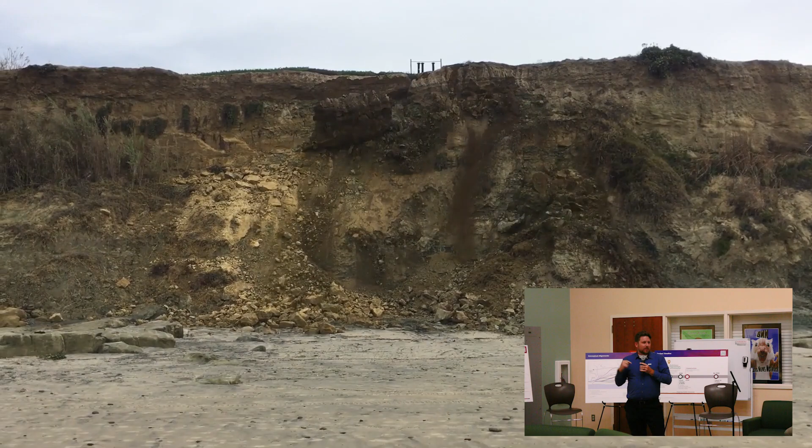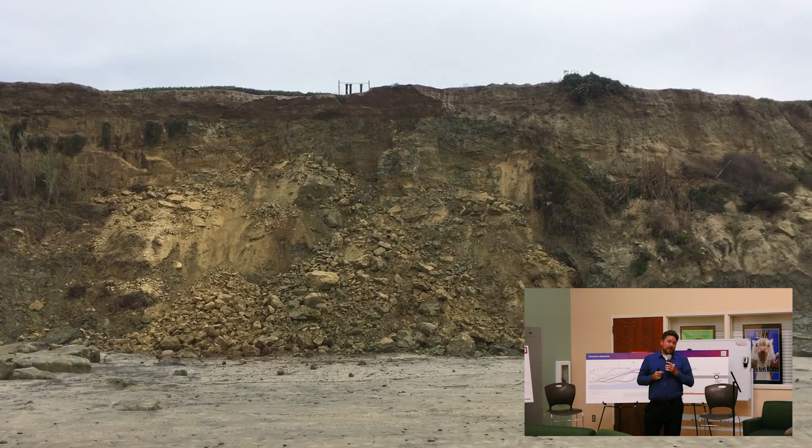This was a video captured in 2019 that shows the Del Mar Bluffs and a small bluff collapse. This type of event happens all the time. We've been monitoring the bluffs with the Scripps Institution of Oceanography, and they've determined that we're seeing up to 6 inches of bluff erosion per year over the last 20 years. That's really the main reason why we need to get these tracks off these bluffs.

But it's not the only reason. We also have a vision for this whole corridor. It's not just in Del Mar, this is across the whole corridor.

So in 2021, SANDAG approved and adopted this Transit Leap vision as part of the 2021 Regional Plan. With that vision, it talks about major improvements in this corridor. And remind everybody, it's not just the Coaster, it's also the Pacific Surfliner trains that go to LA, Santa Barbara, San Luis Obispo, and it's the freight trains that serve our Port of San Diego and our military institutions. We're talking about, in 2050, 1 Pacific Surfliner train per hour per direction, 3 Coaster trains per hour per direction all throughout the day, and a travel time of 33 minutes between Oceanside and downtown San Diego. Now, you can't drive that fast today, even in the middle of the night, but that's the transformational vision we have for this corridor.

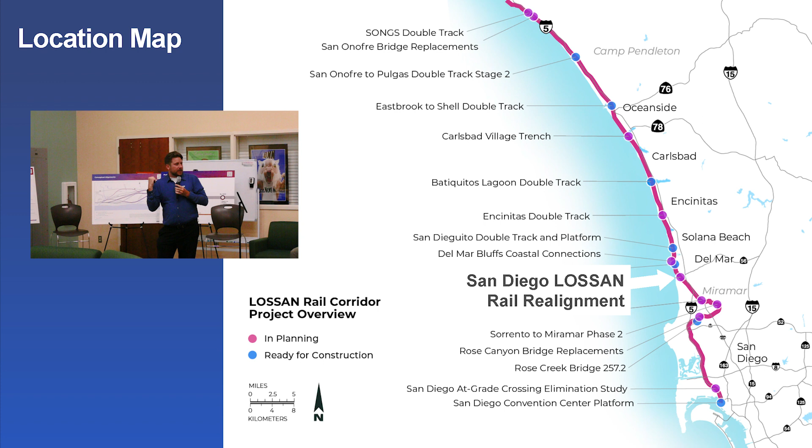Ultimately, they do have plans for a long-term solution up in Orange County, but that's several years away. We want to work with them, we're not competing with them, we're all in this together. This whole LOSSAN corridor - improvements in Orange County benefit San Diego, and improvements in San Diego help Orange County and LA, and vice versa. We're all connected.

All right, so let's talk about the project goals. This is really important in the context of the reasons why we're doing these projects and what these alignments are. So, of course, the obvious one: relocate from the bluffs. We need to identify somewhere else to put these tracks from this stretch that's right along the bluffs in Del Mar.

Two, we want to minimize community impacts - not just in Del Mar, but Del Mar Heights and Solana Beach. We want to preserve access to the fairgrounds - that's a regional community amenity.

We want to improve travel times and achieve that transit leap vision. How do we do that? We straighten curves and we add double track. Right now it's single track, so trains have to wait. All of our plans include straightening curves, improving the speeds, and double tracking.

We also want to improve coastal access and safety. There's an at-grade crossing where cars and trucks cross over the tracks right next to Powerhouse Park, and there's people walking along the bluffs there. We want to make sure we can improve the coastal access, open those bluffs up for people to enjoy, as well as improve the safety for the people using that facility, as well as for the train itself.

And we also want to preserve wetlands. We're also going through Los Penasquitos Lagoon - that's a single track section - and we also want to preserve the wetlands up in San Dieguito.

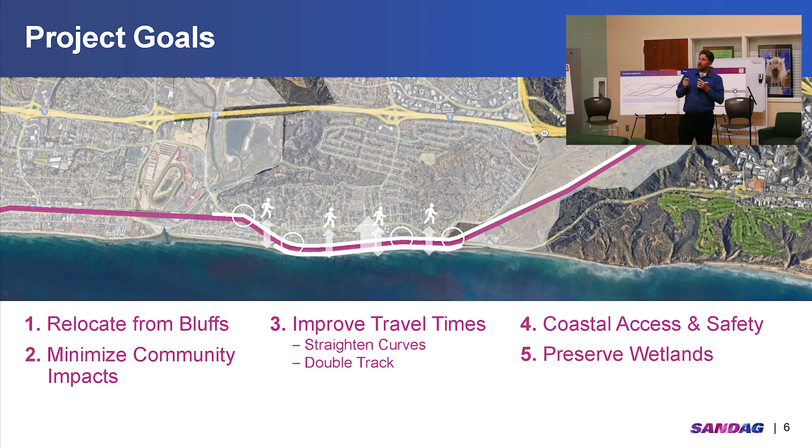Okay, so why a tunnel? Well, when you look at Del Mar, there's really no open path where we can realign this corridor. It's all developed, and what you also notice is that there's very steep terrain. We've got the San Dieguito Lagoon on the north side and the Los Penasquitos Lagoon on the south side. If we want to achieve the goals of the project - straightening it out, minimizing impacts - the best way to do it is put it underground. That's why all the alignments we've looked at so far have all been tunnels. I'll explain a little bit more why.

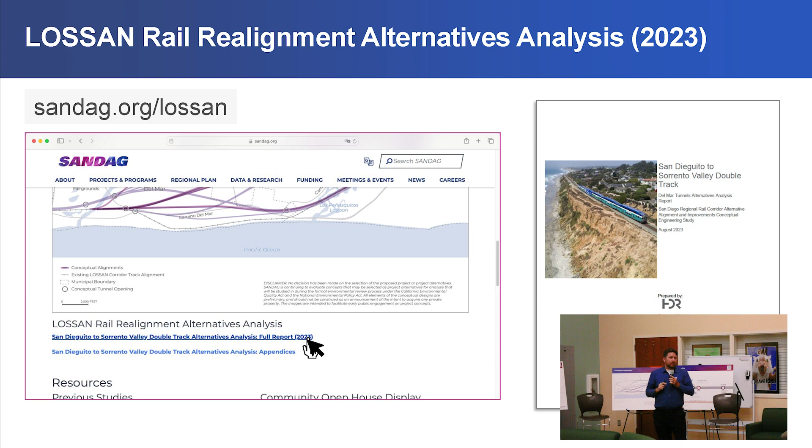So how are alignments selected? Let's get into that. Over the last two years, as Robin mentioned, we've been working and completed the LOSSAN Rail Realignment Alternatives Analysis. If you go to this website, you can see the culmination of all the work we've done. Click on that 2023 report - that's the most current information, and it has all of our information on this project. I recommend everybody go there and read that to get up to speed on where we stand today. I'm going to cover what's in that report, and you can actually talk to several of the folks at the tables afterward if you have questions or want to see more details - we have people that have worked on that.

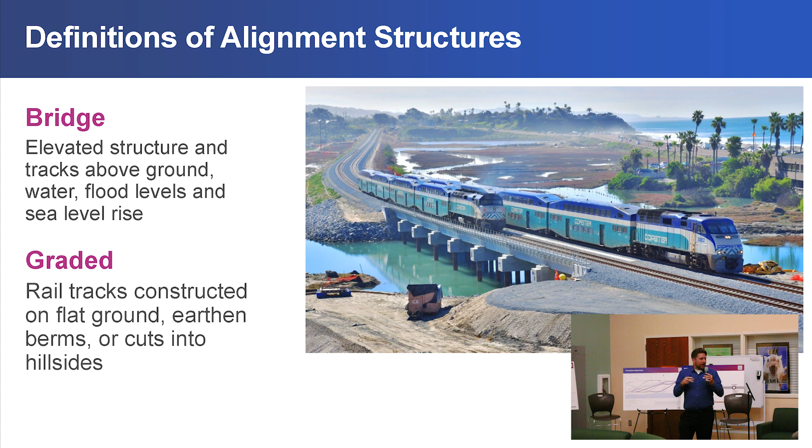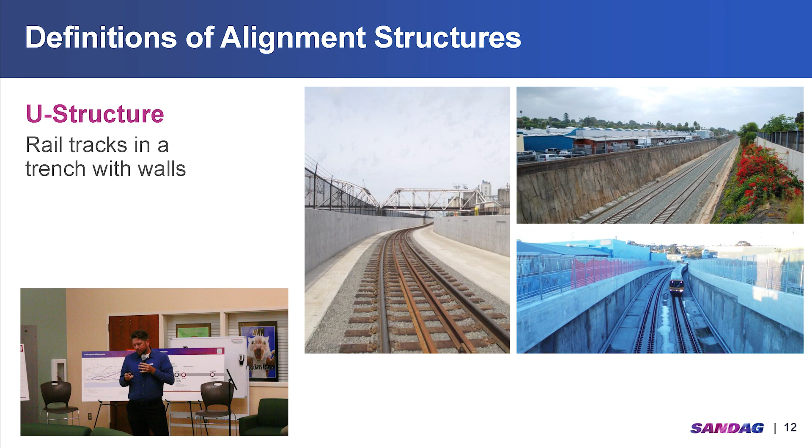And then we have cut and cover. So these are tunnels, but these are tunnels that are shallow, that are connected, that are constructed from the surface and then backfilled over, so you can deck over them. Usually as you're transitioning from that U-structure to a tunnel, you start with a cut and cover section. But obviously with that environment, you have a lot of surface impacts.

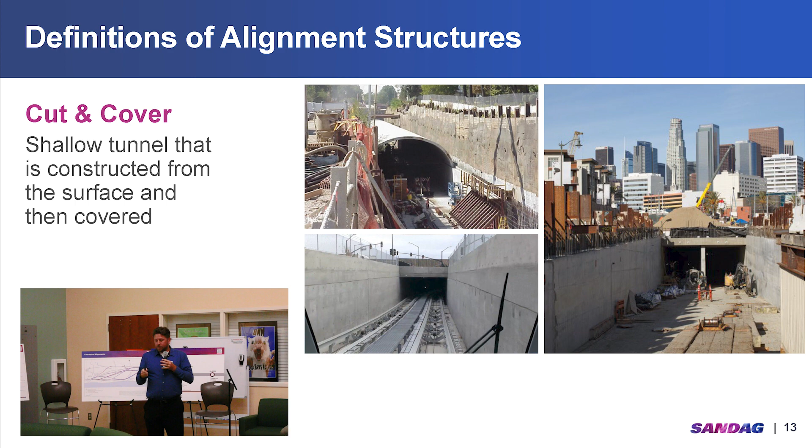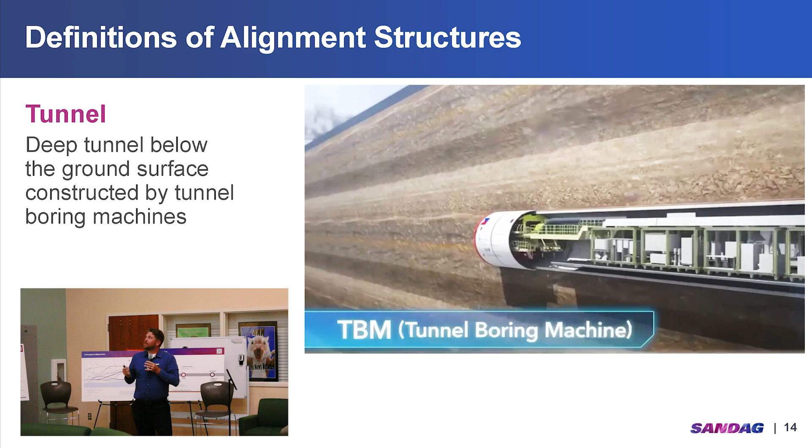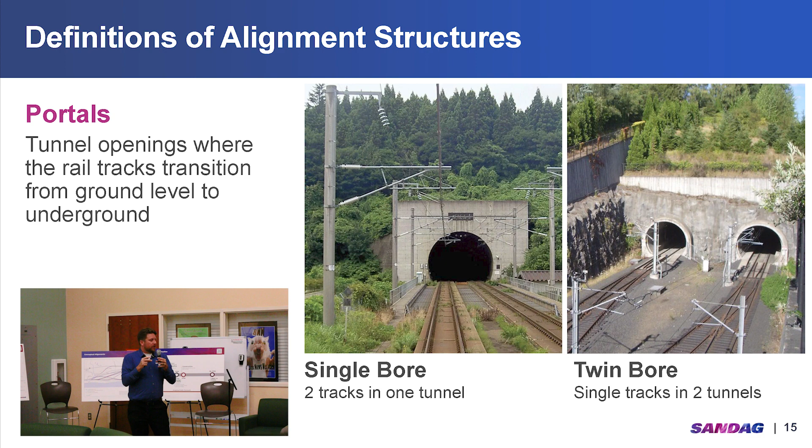And then we have things called portals. Essentially these are just the openings where the tracks go from the surface to underground. We have two configurations we're looking at: single bore tunnels and twin bore tunnels. Single bore just means it's a larger tunnel but with two tracks in it. Twin bore is smaller diameter tunnels, but two of them side by side with one track in each.

And then it's also important to note that when we're designing these rail corridors and alignments, we can't make these things up. We have to stick to engineering best practices and standards. It's talked about in the report—you can check out Appendix J, and that highlights all the engineering basis of design requirements that all of these alignments must adhere to. This will make more sense as we jump into it in a little more detail here.

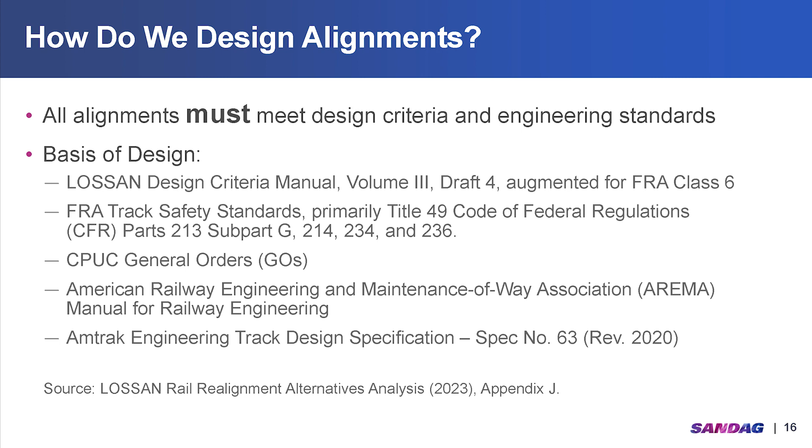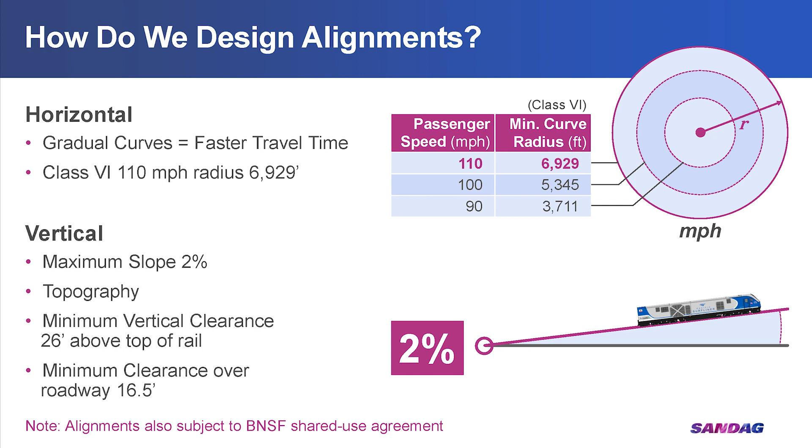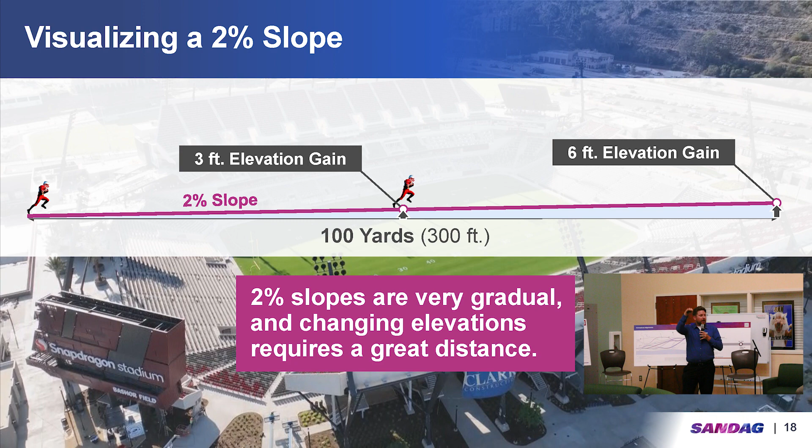So how do we visualize a 2% slope? We talked about how it's very gradual. Let's have a hypothetical—it's football season, our Aztecs aren't having the best year, but let's say we're returning a kickoff. We got a football player on the goal line, and as he runs up to the 50-yard line, he's 3 feet higher on a 2% slope. All the way at the end of that football field, as he's scoring a touchdown, he's only 6 feet higher. So from one end to the other, that's the maximum slope of a rail corridor. Essentially, 2% slopes are very gradual, and changing elevations, going from above ground to below ground, requires a great distance. So those are the two important things.

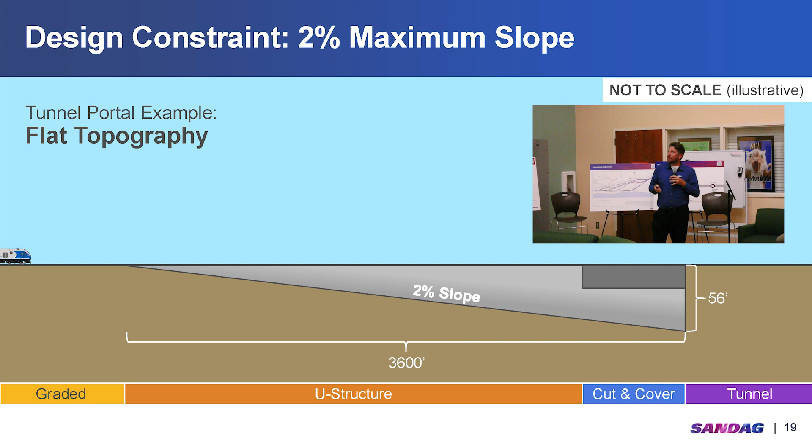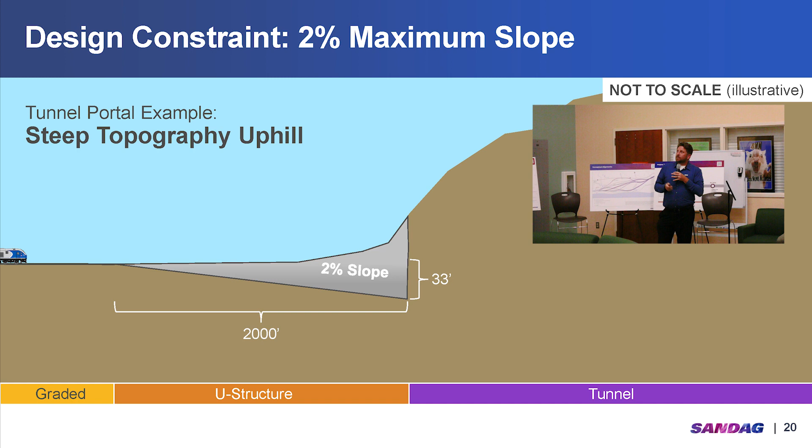Now, we also heard a lot about a portal in the fairgrounds. This is what we hear a lot, like just put it in the fairgrounds. And I just want to illustrate some of the challenges with that. I think it's difficult to see when you're looking just on a map. You've got to look at it from the side view.

In this instance, I'm going to replay it again. Let's see if it'll work. So if we're coming off Solana Beach, even though it's in a trench, it's much higher than where it is in San Dieguito Lagoon. In order to get down underneath the lagoon, we've got to be deep enough below the surface of the river. We'd have a large cut and cover section and then a large U structure. And look at that, over almost 7,000 feet to get back up to grade if we're dropping that deep. So that is a challenge. It's just a much bigger structure if we're going against topography on a downhill.

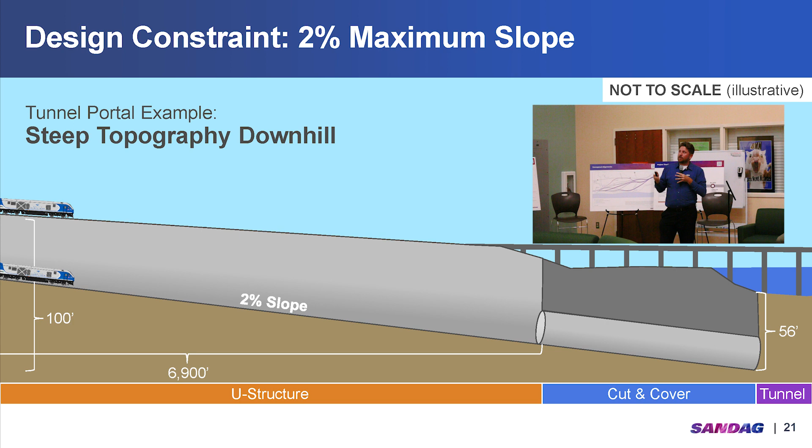Okay, so let's look at vertical clearances. This is another key factor. So I talked briefly about twin bore and single bore, but in the context of these alignments, twin bore, they have a wider footprint, but they can be shallower, so that vertical transition doesn't have to be as deep before we can start the bored tunnel section. When you have a single bore, the footprint's a little narrower, but we have to be much deeper.

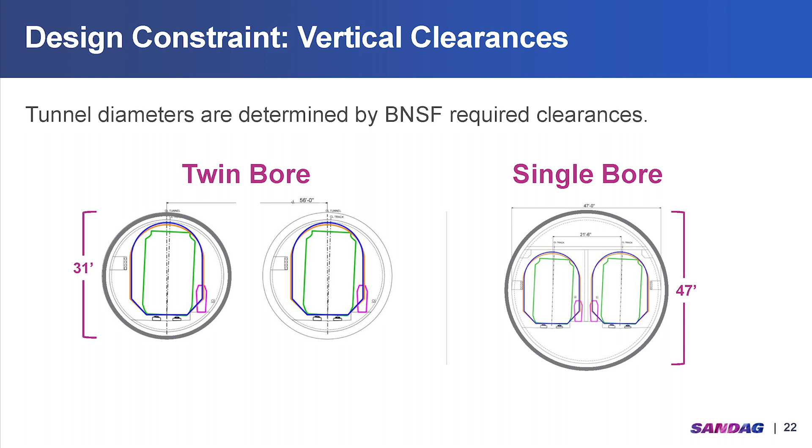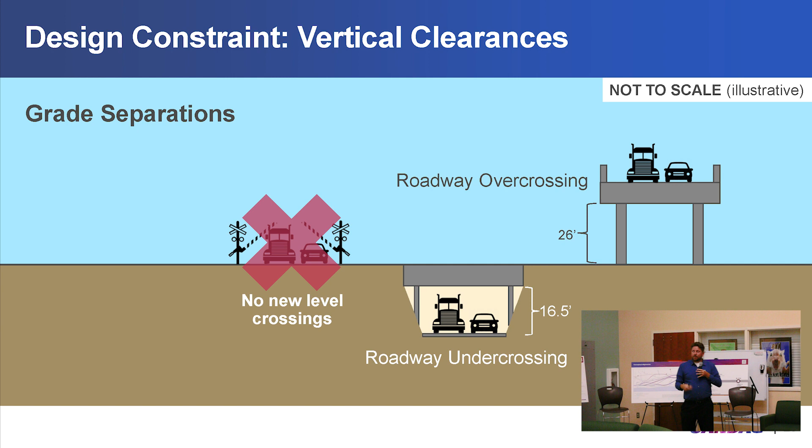And so there's trade-offs with each of these, and so we're looking at that. So that's another constraint. Another thing with grade separation, remember the goal of safety. We will not have any new at-grade crossings. So when we're crossing roadways, we need to make sure that we have the appropriate vertical clearances for roads to go either under or over. And you got to think about the ramping up and down of the roadways to get over or under the rail corridor. And that has a footprint of itself too.

Okay. So the alternatives analysis, they have maps like this. This talks about the different types of structures. So this is Camino del Mar. I'm going to go through all of these, and it shows where we have a graded section. So this one ties in right at the San Dieguito Lagoon. So we have a double track project with a platform at the fairgrounds. This particular alignment ties into the south abutment of that bridge.

Let's see if I can use the pointer right there. And so we're on a graded section. We go down into a U structure and go under Jimmy Durante and into a deep bored tunnel, roughly, but not directly under Camino del Mar. And then we pop out under Carmel Valley Road and have bridge structures. And those yellow lines are the bridge structures through Los Penasquitos Lagoon. And that is where the existing rail corridor is. And there's bridges on there, but those are single track bridges, and they're not as wide as the ones we're proposing here.

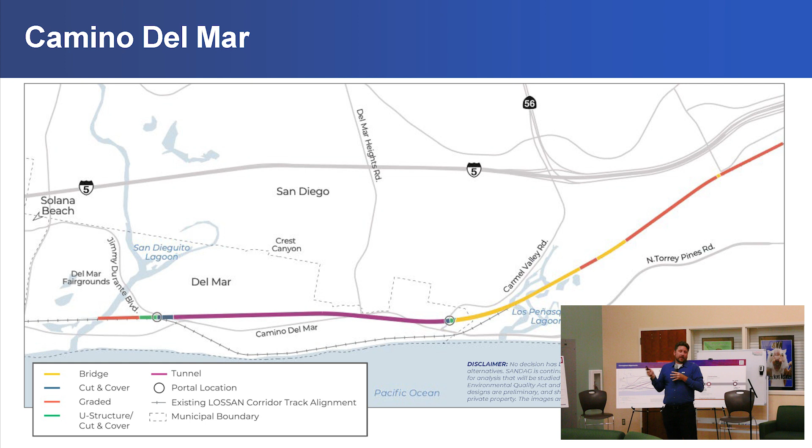So our goal is to have no net fill in the lagoon. So if we're taking a bridge, or if we're adding longer bridges instead of wider berms when we're in lagoons, to minimize, and that goal is preserving wetlands.

So we'll go through some of these a little more quickly, and we have a map up here too. So if you want to look afterward, you can come talk to me and we can go through each of these. But we have Crest Canyon and above with essentially the same alignment where we go under Jimmy Durante, but this one would pop out over Carmel Valley Road near the 56 interchange.

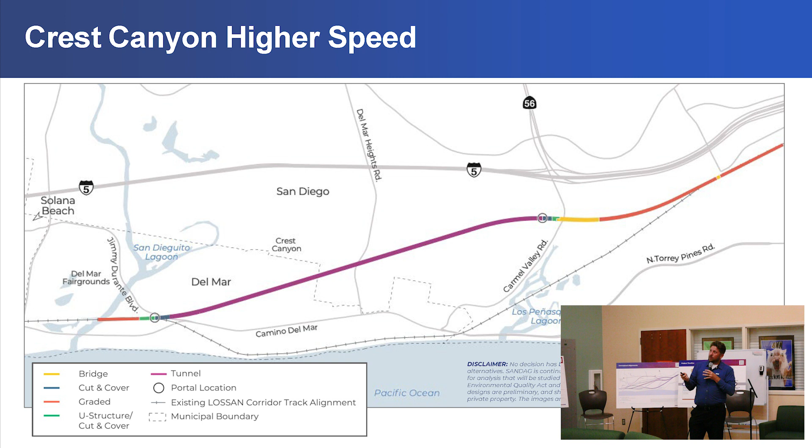This one starts in the same spot. We go under Jimmy Durante, tie into that new bridge, but this one stays in the tunnel under Carmel Valley Road and pops out at a portal location near the knoll, near the pump station out by I-5.

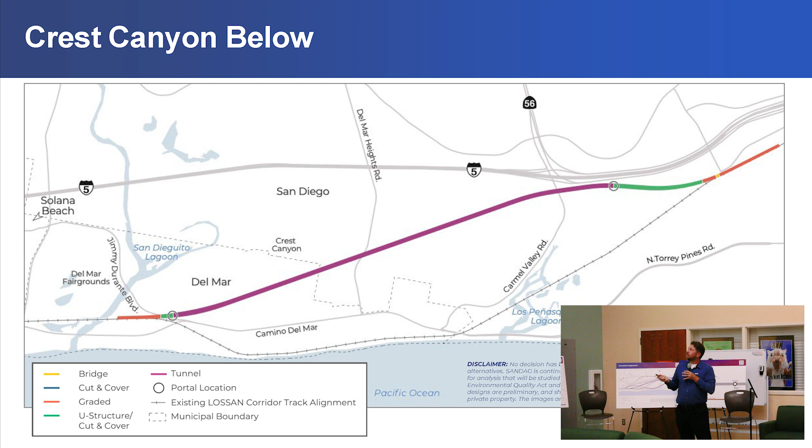And then the I-5 alignment. This is one we hear a lot about. I'm not sure if it's the same alignment people have in mind, but this is one we've looked at, and we're looking at other ones as well.

This one starts north of the river, tying in at the south end of the new platform to be constructed at the fairgrounds, then a bridge structure over Jimmy Durante, then a viaduct along the south edge of the San Dieguito Lagoon, into a U structure.

Right near Crest Canyon, then into a tunnel under I-5, curving back out to Portofino. I hear a lot about why don't we just go straight through under I-5. Well, at the interchange with 5-56, those are large bridge structures with deep foundations, so there are constraints on how we can put the tunnel through there. We need to avoid those deep foundations at the interchange, which is one reason it curves away.

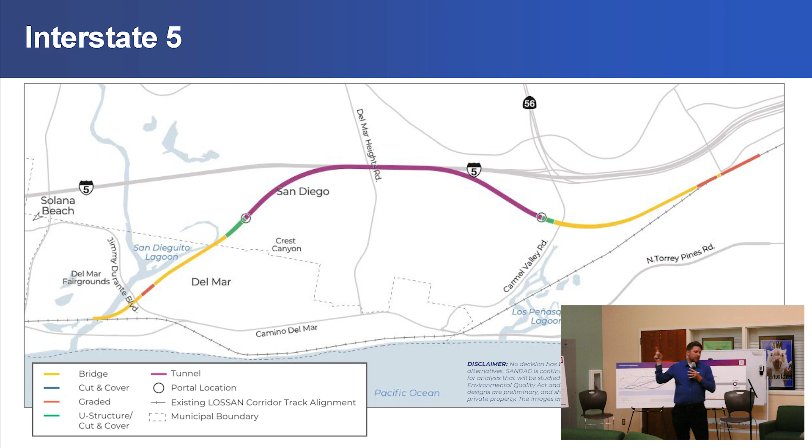So you'll see this map - this is our alternatives analysis. We started with those five alignments and heard some initial feedback asking why we couldn't put the portals somewhere else, and whether we could look at different locations. So that's what we did - we started looking at several of these locations.

So we have the Jimmy Durante location there. These two were identified previously. We looked at a portal location in the Del Mar Fairgrounds and how that would work - that's all in the report. We have one that's basically into the hillside, right above the roundabout on Jimmy Durante.

We also looked at other locations - this one's actually very similar to the Jimmy Durante one, but instead of going straight under Jimmy Durante and into the hillside, it curves to the west a little bit. That one keeps the portal all within the public right-of-way under the roadways, Jimmy Durante and Camino del Mar, and then goes into a deep bore tunnel.

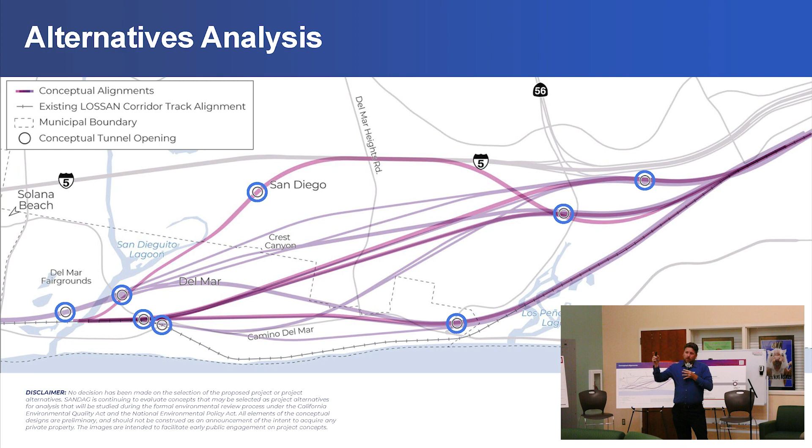And then the I-5 knoll. This is another portal that has seen a lot of promise as well, because it keeps the portal away from homes in this neighborhood and reduces the footprint in the lagoon. But there are different challenges with that one, with larger U structures within the lagoon.

Other considerations - horizontal and vertical alignment are the big ones, but there are other issues. We've got constructability: we have to maintain rail operations when we construct this. The duration of construction is now 7 years - that's long, but if it's more complex to build, it'll take much longer.

Rail operations - maintaining rail service, how do we do that? And traffic impacts - if we're disrupting roadways, we need to design for that. Construction staging areas: if we're putting portals where we're launching the tunnel boring machines, we need space to support that operation, so we need to identify where those laydown areas are.

Sea level rise is also a big constraint, and the floodplain, of course - the whole lagoon area in the fairgrounds is obviously in a floodplain, so we need to make sure this corridor is resilient to flooding. We want to make sure we have access to the fairgrounds with the platform, and there are also maintenance and operations issues. We need to build this.

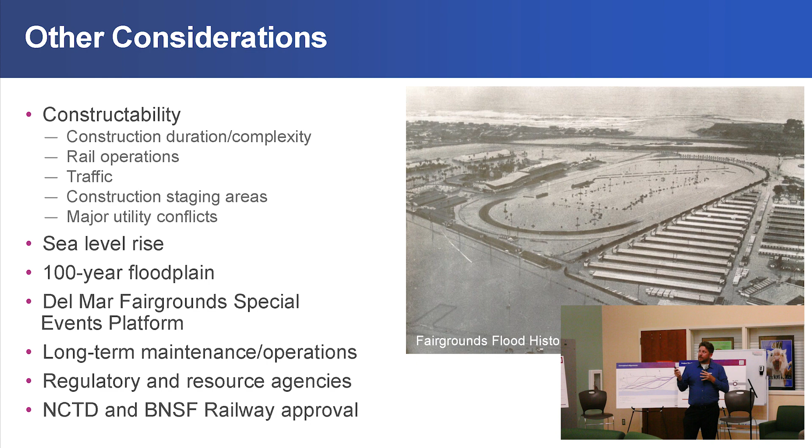NCTD is going to own and operate it, so we need to make sure that we build something they can do that with. And it's not just the public and the engineers, there's also the regulatory agencies that have input on this project. And then NCTD and BNSF - NCTD is going to own and operate this, and BNSF has the right to operate trains on this.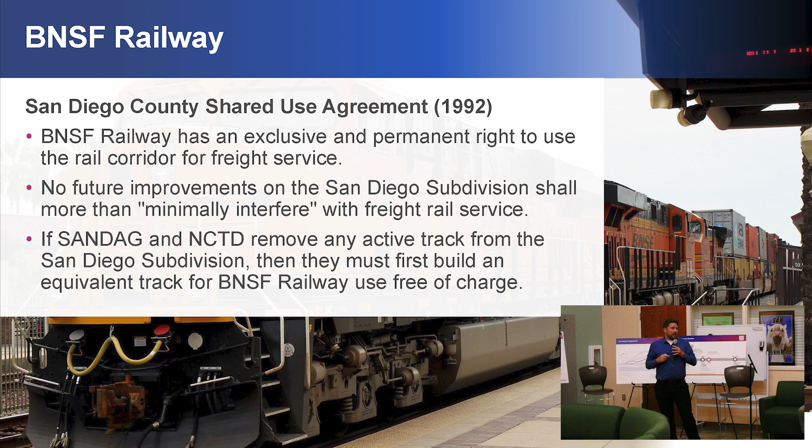I have a new slide here on BNSF. We get a lot of questions about BNSF, like, wow, they're a constraint. That 2% grade is because we run freight trains on this corridor. Yes, this corridor is publicly owned - it was purchased in the 1990s from the Santa Fe Railroad, which is now BNSF. But as part of that purchase agreement, there's a shared use agreement from 1992, and it has these requirements. Essentially, we can't do things that are going to hinder the rail operations of BNSF. That is really restrictive to what we can do, so we can't just say no freight trains on here. This is a freight corridor, and there will always be freight trains on this corridor.

Let's move on to the process and what we're doing with the feedback we're getting. Through November, we're collecting all these new ideas. We shared with you some of the lines we've drawn on the map - that's the spaghetti map here with all the purple lines on it. We're collecting more lines, so we'll have an exercise following this where you can draw your own lines and help us identify what we've missed or what we need to look at. Throughout the winter, our engineering team will be looking at and evaluating all the different alignments. Then in spring of 2024, that's when we will begin the scoping process and identify that range of alternatives that will be carried forward and studied in further detail.

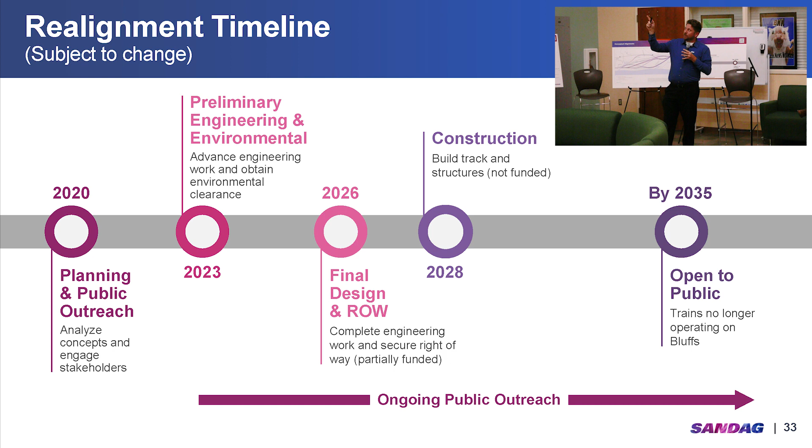From spring of 2024, we have that range of alternatives and we're going to do a whole bunch of work. That's going to culminate in the 2025 draft environmental document, and then a final decision will be made in 2026. So that gets us to 2026 on how we get there. Once we figure out what alignment we do, that's when the decision's been made. Then we can design it all the way to 100%, which will take 2 years, and we can start construction - pending we find construction funding - in 2028. With a 7-year construction timeframe, that gets us open to the public in 2035.